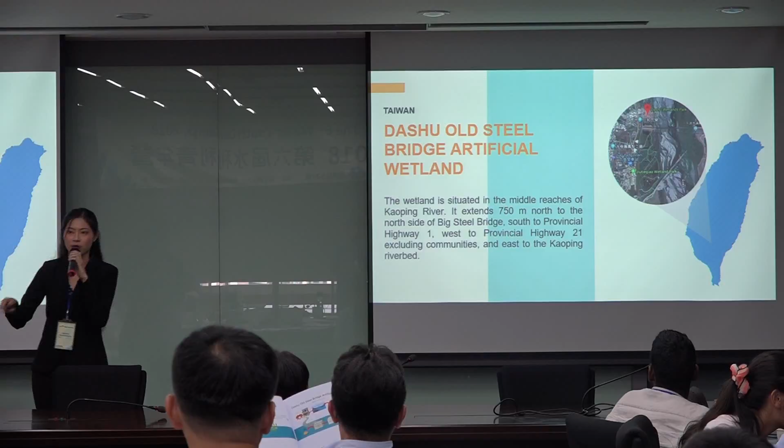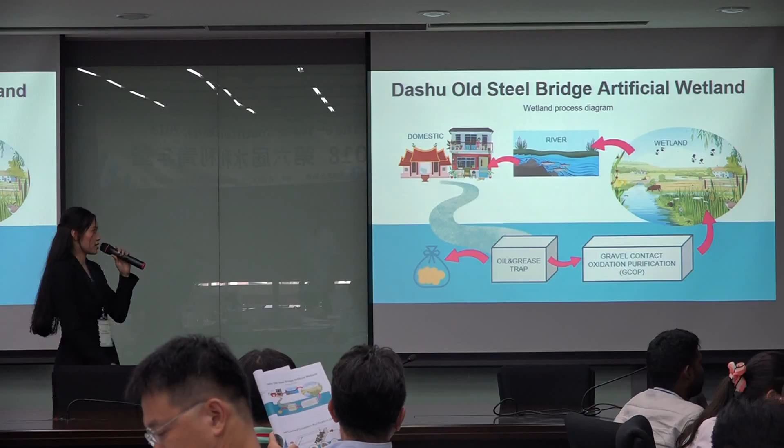Biofilms that cover the gravel are capable of degrading organic substances. So the effluent can be purified, but it still has to be treated again by wetlands as a second process. So the water that comes out is clean and of better quality, and can be released back to the Kaoping River.

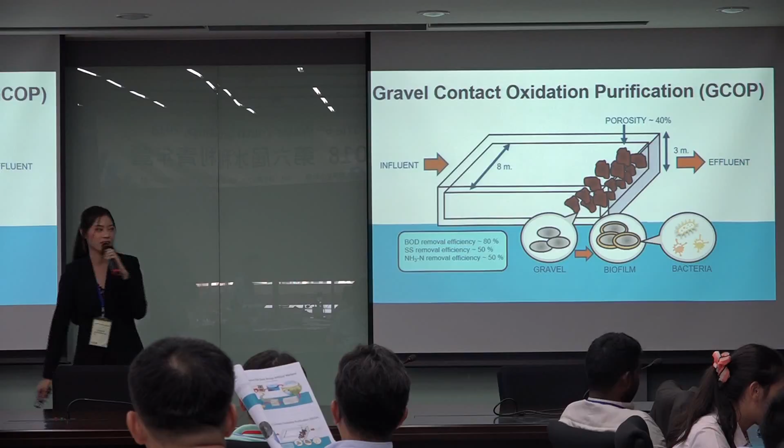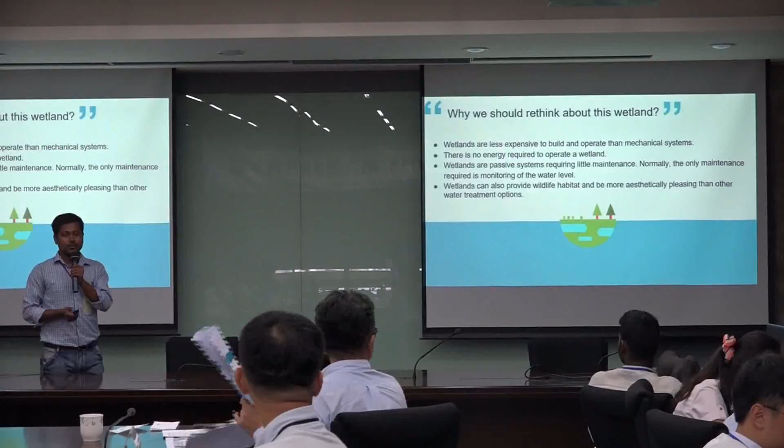With the present condition, the wetland in the Dashu area, Kaohsiung, is not getting stable water sources from nearby households to treat and supply to the wetland. And after the 2009 typhoon, it faced a huge siltation problem. We should think about how to relieve the wetland, because the wetland is one of the cheapest ways to treat wastewater, it takes less management power, less energy, and it provides a pleasant environment for visitors.

It is very important to protect our wetland. So we came up with 2 solutions to solve the unstable water and the siltation problem. We use a super tree to stabilize water supply. Look at the super tree. There are 3 sources for the super tree: rainfall, hyporheic flow, and moisture.

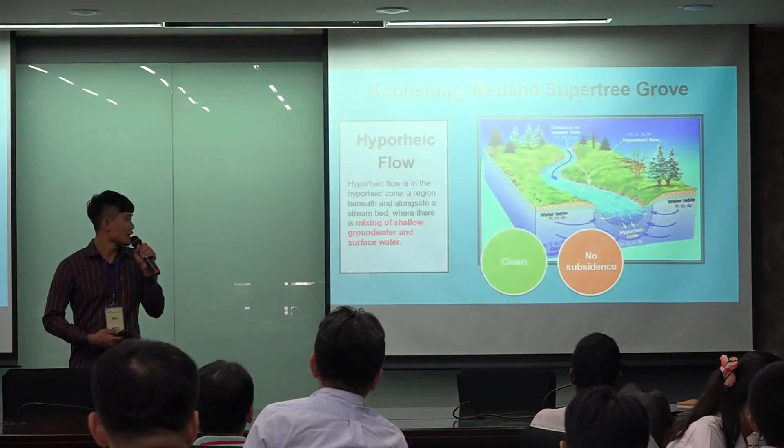I want to introduce hyporheic flow first. Look at this zone. Water in this zone mixes shallow groundwater and surface water; we call it hyporheic flow. Why do we use hyporheic flow? There are 3 reasons. One, hyporheic flow is cleaner. Second, if we manage it properly, the ground will not subside. And third, because hyporheic flow is slower than the river, we will have a longer water intake period.

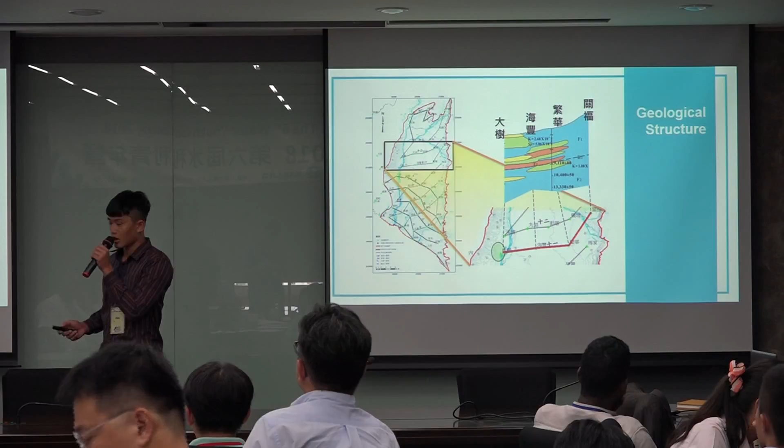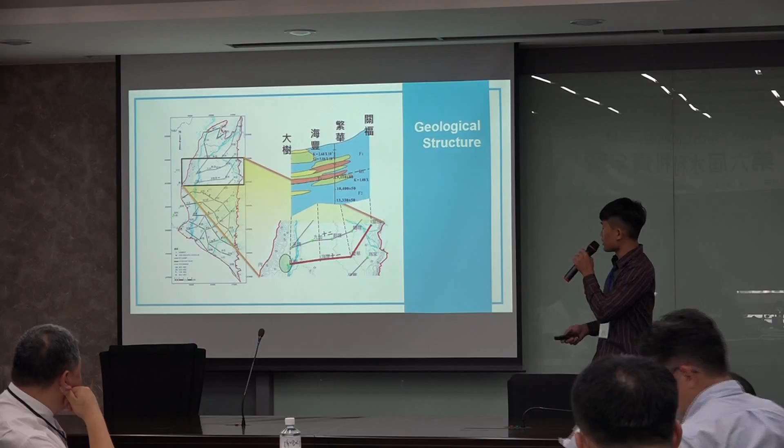Maybe someone will ask, is it proper to use hyporheic flow in this area? We can check the geological structure in this place. This is the dark blue area, and the dark area is mostly sand and gravel in the first aquifer. This is a good condition to collect the interflow in this area. And this is the radial well.

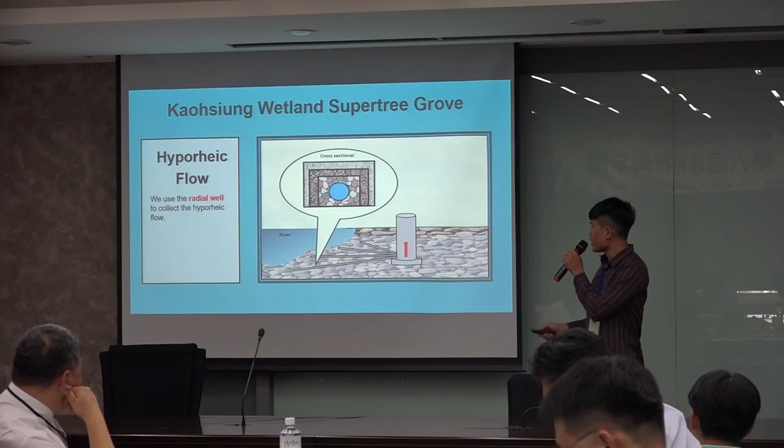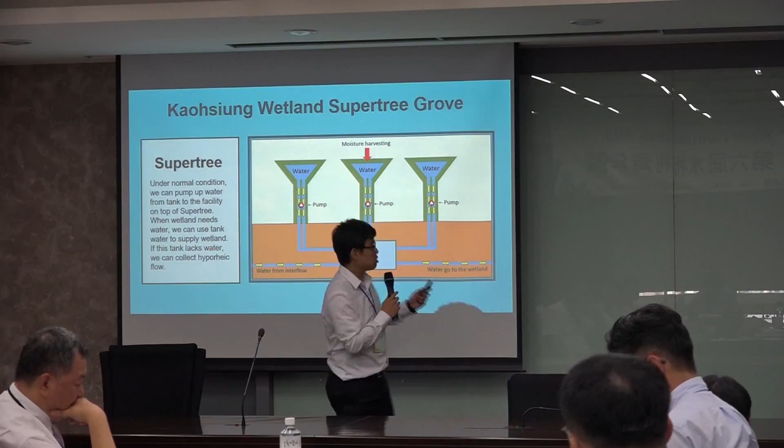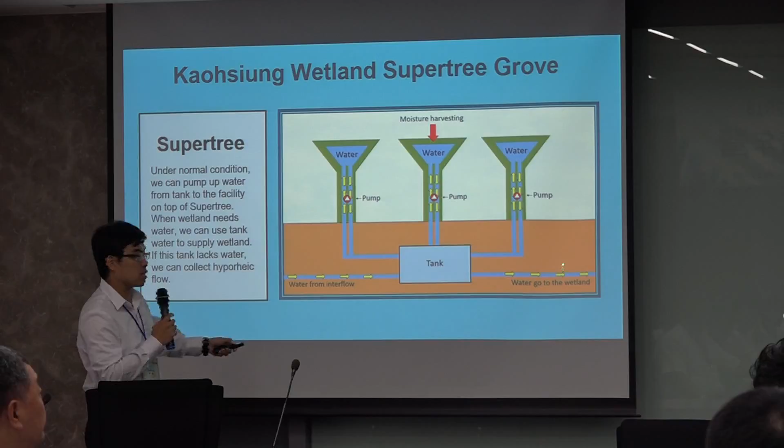Alright, thank you, Alex. Besides rainfall, we also do moisture harvesting on the roof of the super tree, and we store the water in the tank normally. When we need water, we can pump it out. That's why we have the pump. And when we lack water in the wetland, we supply water from the tank.

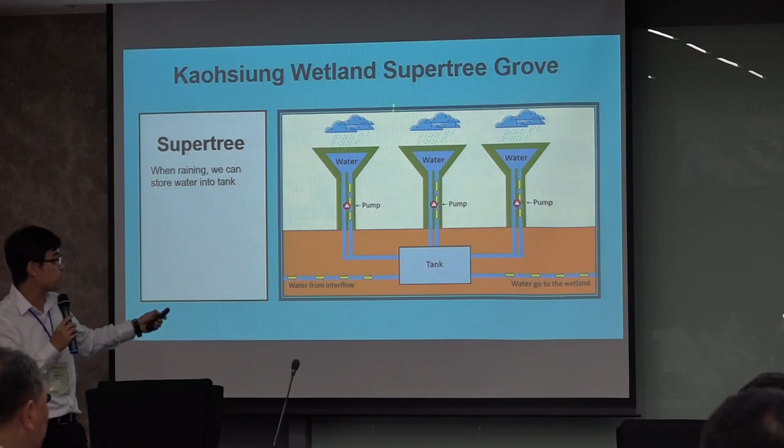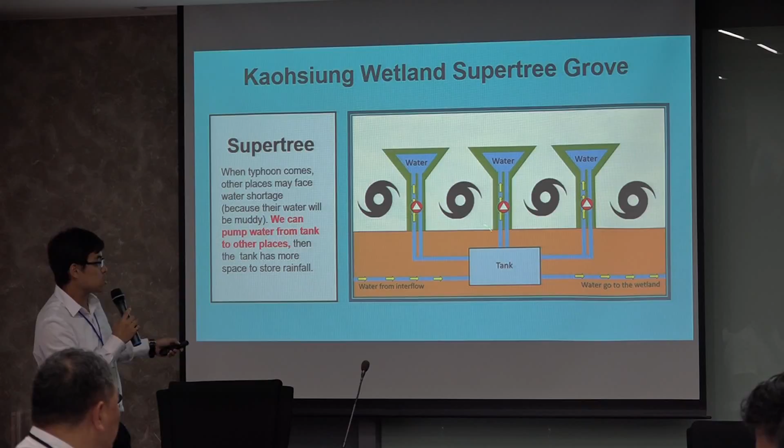Next. When we have rainfall, we can collect water on the roof and direct it into the tank. When we have a typhoon, other places may not have clean water, so we can supply our stored water to these places and empty the tank. With our empty tank, we can collect a whole lot of rainwater.

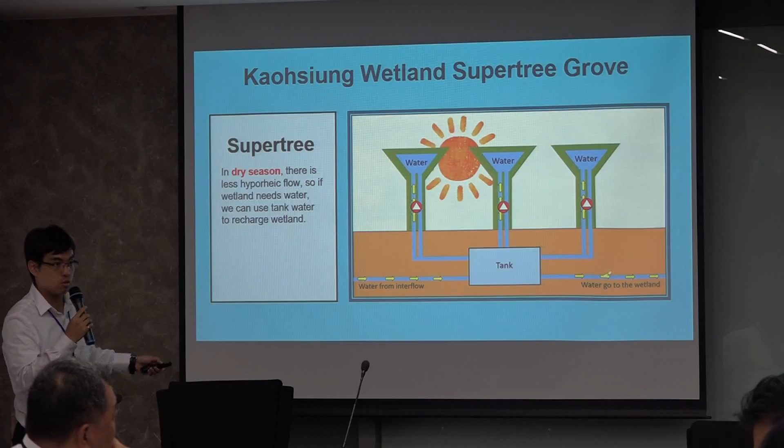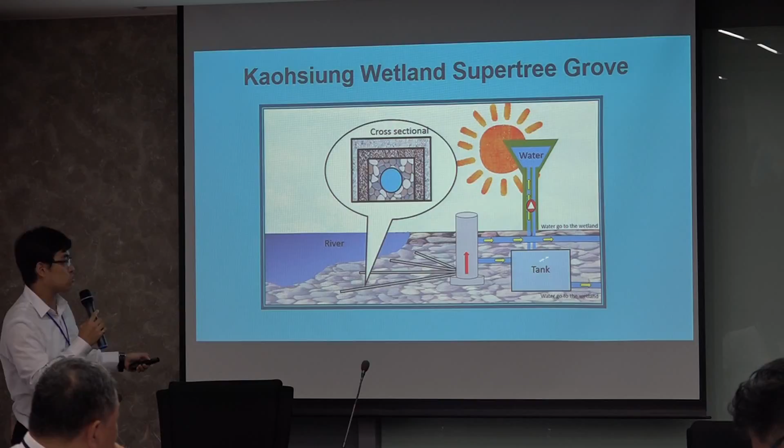This is the overall schematic with all the components. You see the cross section of the radial well here. We have an underground tank storing water, and here's the structure of the super tree.

Thanks, Eve. And let's see.

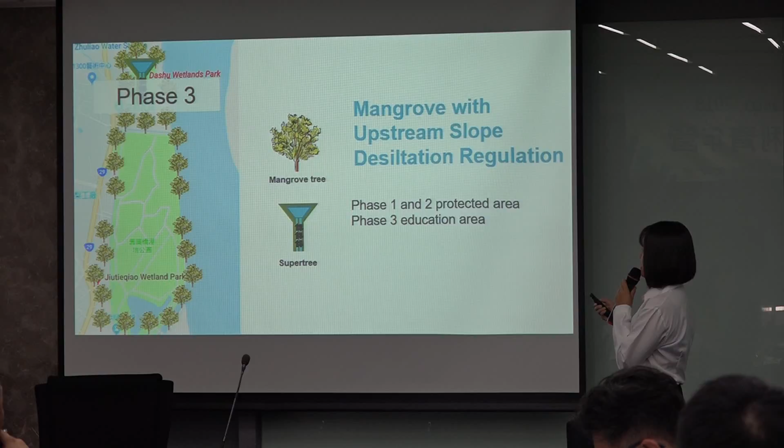We have 3 phases of wetland, and in this picture we can see the super tree is only built in phase 3 because it isn't a protected area. But we should plant the mangrove trees around the wetland, including phase 1, 2, and 3, because it is the most economic and active siltation prevention option for wetland.

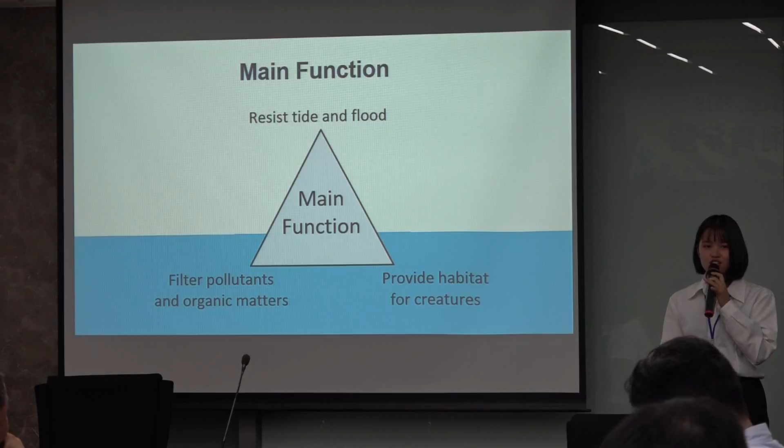And mangrove is an aquatic plant that can prevent the erosion and block flood during heavy rainfalls. And then the main function of the mangrove is that firstly, resist tide and flood. Secondly, filter pollutants and organic matter. And thirdly, provide habitat for creatures. It not only fits local ecology, but also improves the extra natural habitat for water creatures.

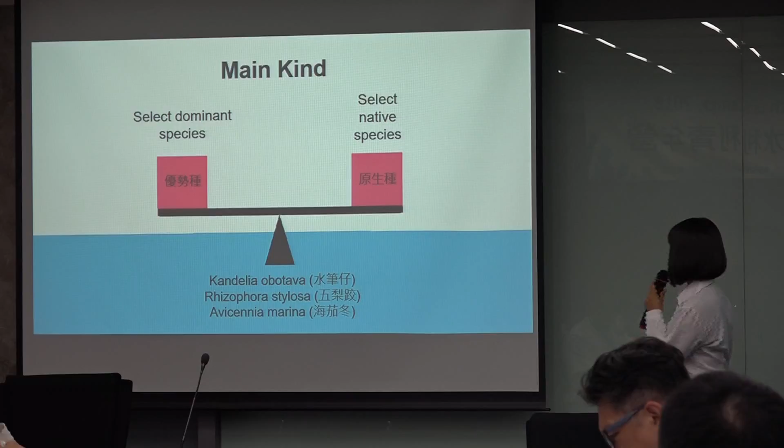And then we need to balance between dominant species and native species because it is the best way when they are in the same species. And we need to use different methods at the same time to treat the river erosion. There are engineering methods and non-engineering methods.

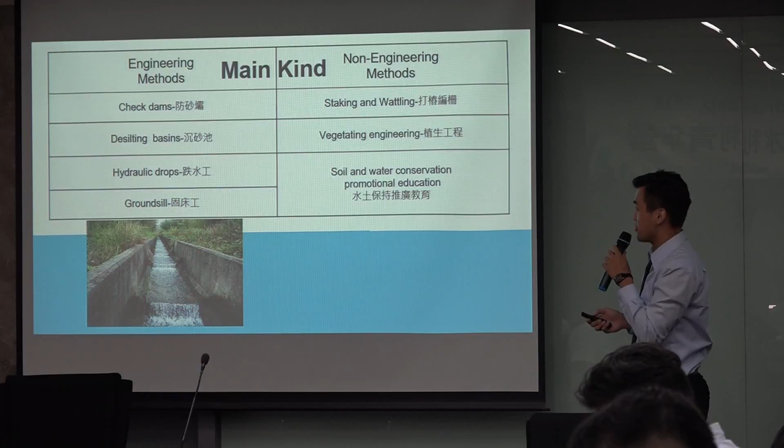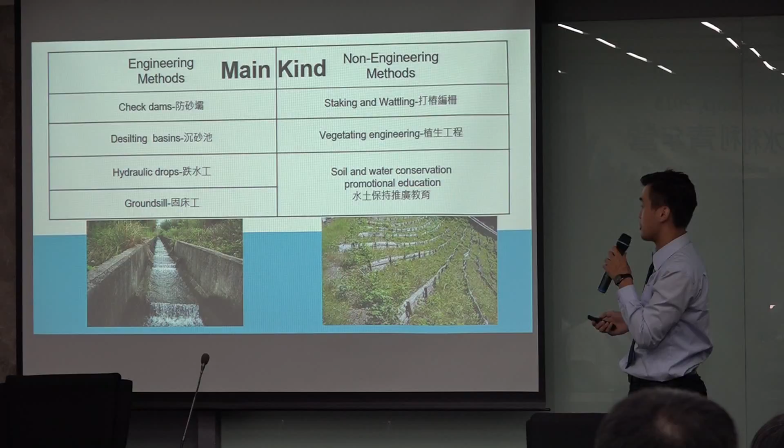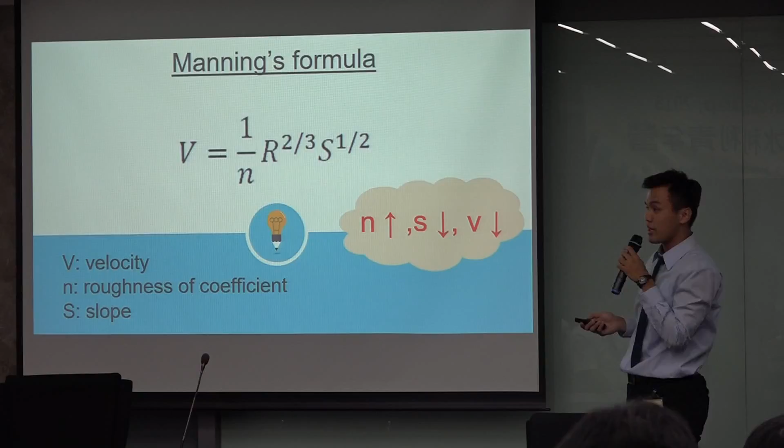By applying the method, we can increase the roughness coefficient and decrease the slope, and then we can reduce the velocity.

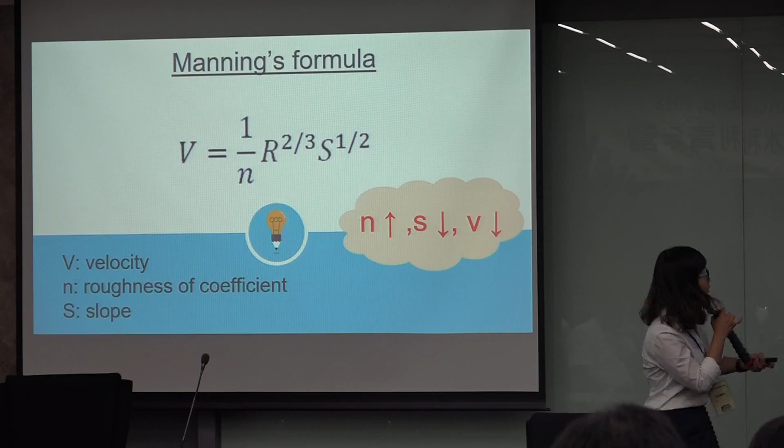Okay, this is my turn to talk about marketing. First, I will talk about SWOT, and second, I will talk about BEE and PTT. SWOT is a word to analyze the business cases. Talking about strength, it can combine business development, ecology preservation, and engineering solutions. And talking about weakness, we had unstable water supply and siltation.

Well, from the short field trip and summer camp of about 2 weeks, it's really difficult to give an effective solution, but we believe. I'm sorry. Okay, so.

I have a question. You want to build maybe several super trees in a river. How to reduce the water level? Because the super trees in the river may cause the water level to get higher and higher. Okay. Is it necessary to clean the underground tank?